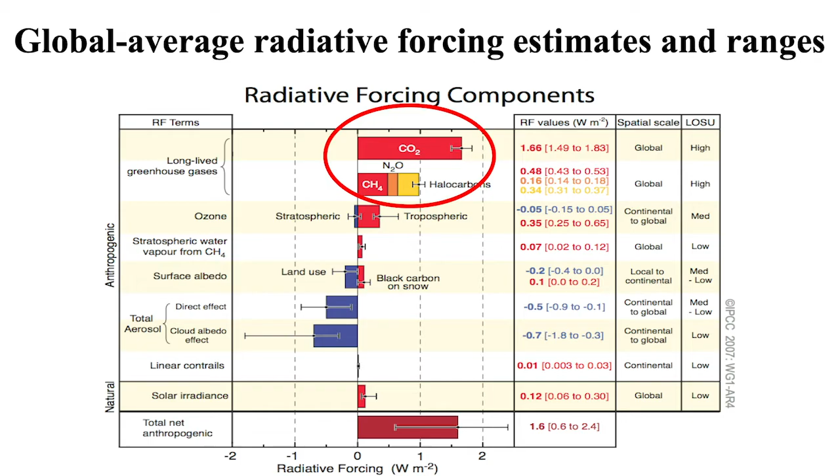The principal reasons are the addition of extra carbon dioxide and methane, CO2 and CH4, into the atmosphere. There are counter effects like clouds, and actually the warming is melting the ice caps, but it leaves the ocean to absorb more heat. The net radiative forcing, as the climate folks call it, is positive and dangerous. And one of the major lessons is we have to reduce the addition of long-lived greenhouse gases to the atmosphere. We're not doing very well at it right now.

So here's how we produce electricity here in the United States. I actually love this diagram. It shows so much once you understand it, and it becomes very clear. I always referred to it as a spaghetti chart until I discovered that it's technically called a Sankey diagram, after a British ship captain who invented it to explain how steam engines worked. Basically, it's a flow diagram, and the thickness of the lines is proportional to the amount of flow in each source.

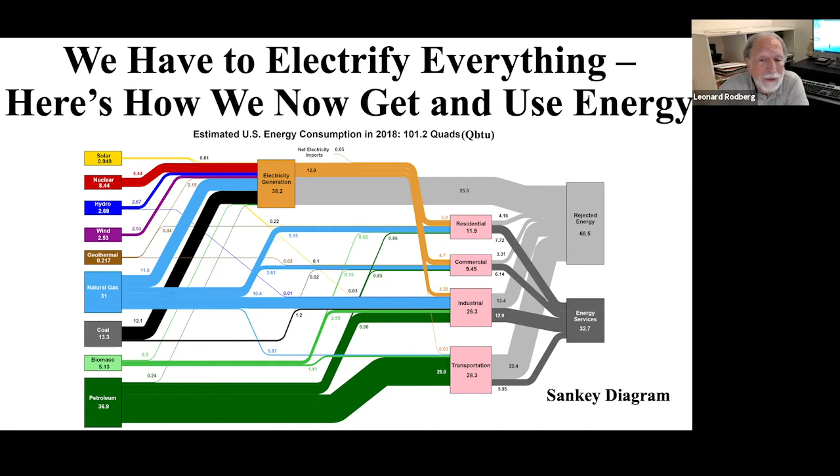This chart is also useful because it's in quads, or quadrillion British thermal units, and it happens that total energy consumption in the US is just about 100 quads. It actually has been that for several decades. Even as our economy grows, we've gotten more efficient at using energy, for a whole variety of reasons. And because it's 101 quads, we can basically treat the number of quads as a percentage of total usage.

And you can see that solar, which is used to generate electricity, is still less than 1% of our total energy use, even though it and wind energy have been the beneficiaries since the 70s of substantial subsidies from the federal government and from state and local governments as well. Wind energy, you can see, is about 2.5% of the total energy use. Nuclear is 8%, and I'm going to, of course, come back and talk about that some more.

The fossil fuels are here: natural gas, coal, and petroleum. You can see that coal is mainly used for electric generation. You can also see the electric generation is about 38% of our total energy use. It's, of course, not final energy. It's then used in one of the four sectors, including here in New York City. A little bit of it drives our subway system.

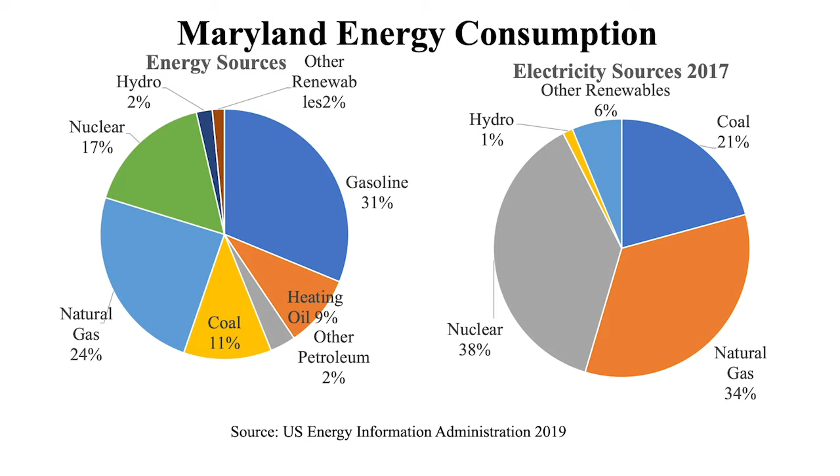Here's Maryland's use of energy. It's somewhat similar. Nuclear energy provides 38% of its electricity. This is the sources of electricity in Maryland. We still burn a lot of coal here. The renewables and hydro are very small. There's the Susquehanna River, the Conowingo Dam up here, but the renewables are still very, very small in total.

And to remind you, here's where the nuclear generated electricity comes from: the Calvert Cliffs plant on the Chesapeake Bay. I call your attention especially to the cost, because I'm going to come back to cost in a little while. It cost $2.2 billion in 2007, basically current dollars, and generates 1,700 megawatts, a little more than $1 billion per gigawatt. A gigawatt's 1,000 megawatts. Today, a nuclear plant built in the U.S. costs somewhere between $8 and $10 billion per gigawatt, rather than one. I'll talk more about that in a little while.

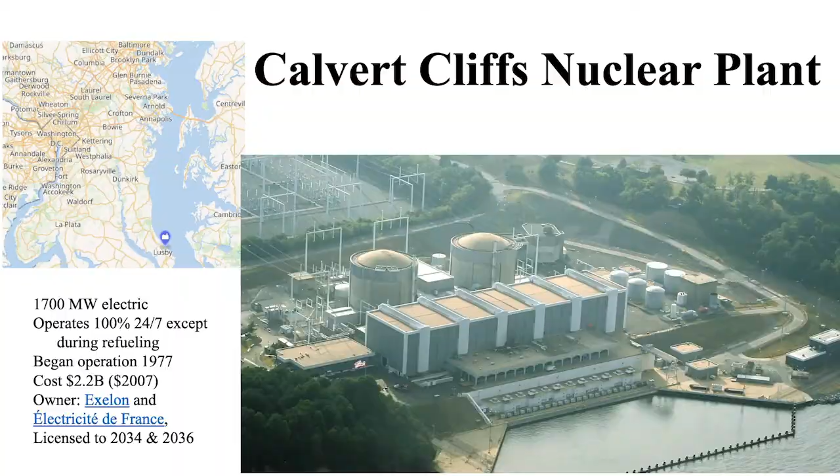Okay, so the major issue we face with the climate is, how do we get rid of fossil fuels? How do we get rid of the burning that generates carbon dioxide and methane? By the way, some of the methane comes from leakage in the pipelines, leakage from the wells from which natural gas is extracted, not from the burning of the methane, but from the leakage of the methane. So, as I said, the most popular belief is that they should be replaced with renewable energy, with wind farms, wind turbines, solar panels, photovoltaic panels, and hydropower.

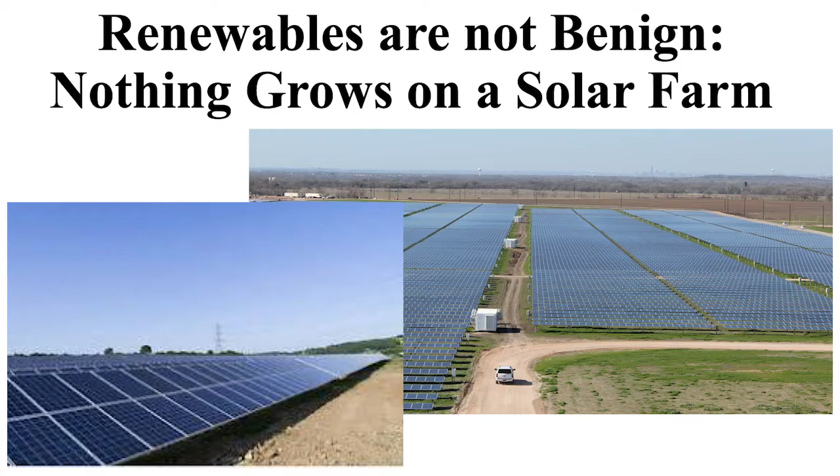So let me look now at the renewables and see what they are and whether they will do the job. First of all, here's a solar farm. It's referred to as a solar farm because it takes up a lot of land. Nothing grows on a solar farm. The sunlight doesn't come through. It's absorbed in order to generate electricity.

When these are built in the desert, and a number of them have been set up in Arizona, they have to move out the animals, the turtles and other creatures that are living in the desert, because they're in the way of the construction, but also they can't live under this. So this would convert a lot of green pastures and green prairies into, well, wasteland, just brown.

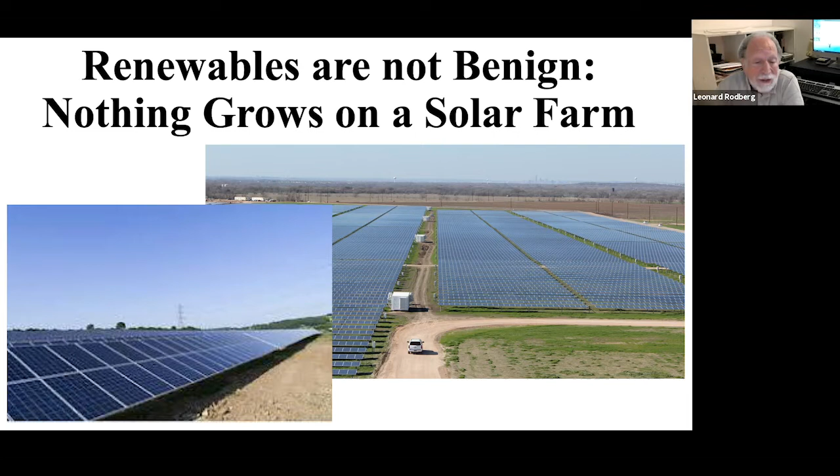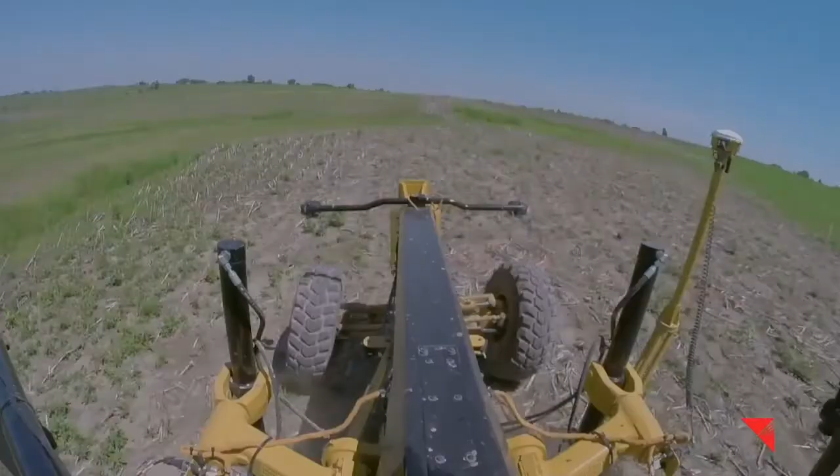And I want to show you how a wind turbine gets built. This is MidAmerican Energy, which is one of the installers of wind energy. Take a look. You'll see it's a major construction project with significant environmental impact. It is not some small do-it-yourself project.

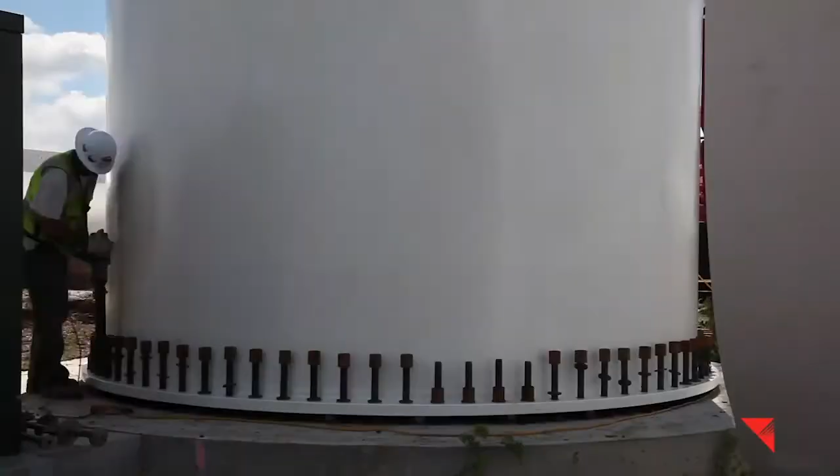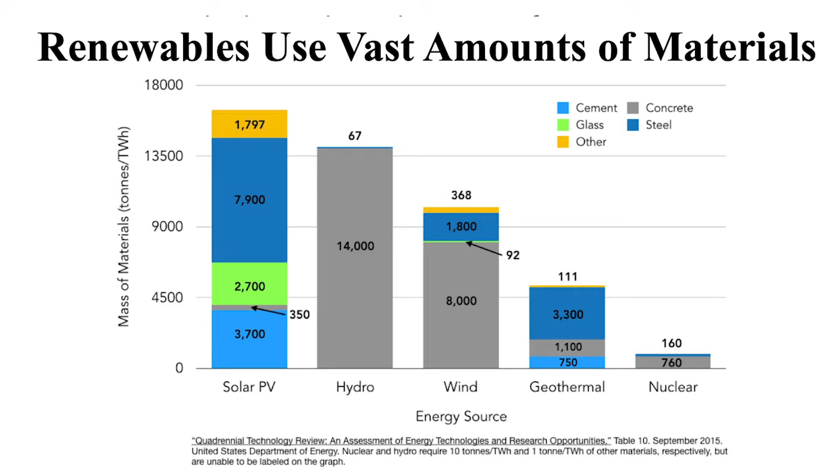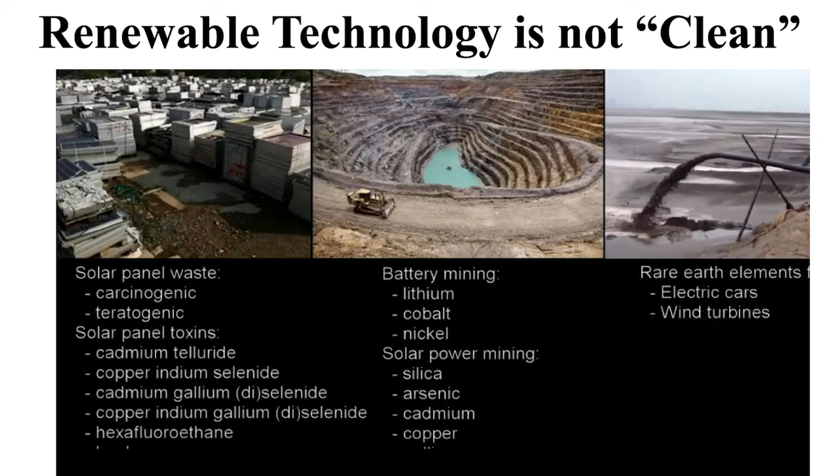They're not, again, easy to use materials. They come from mining, extensive mining, particularly in China, Africa, other places. Doing this on a much larger scale than we're now doing will have even greater environmental impact than it has now. And they generate a huge amount of waste.

And this is all toxic waste, because a lot of these materials, if you try to recycle them, involve rare earth metals and various things that we tend to ship out to China and other places and let other people deal with the residue from our waste stream. And this is a huge waste stream, especially if you think about trying to run the country on it.

So there are practical problems that I think explain why solar and wind, in spite of the support they've had, both financial and political, over the last 50 years, still are a very small part of our energy mix.

It's hard to quantify, but the decision to install any of these, any place in the country, is broad, diffuse, involves many individual decision-makers in thousands of communities and millions of homeowners if we intend to go all the way to trying to basically power our country, our society here and globally with these sources. They have to agree that they want these facilities installed in their neighborhoods. You've probably read or heard about people who don't want to see the windmills offshore from their summer retreats on Cape Cod and other places.

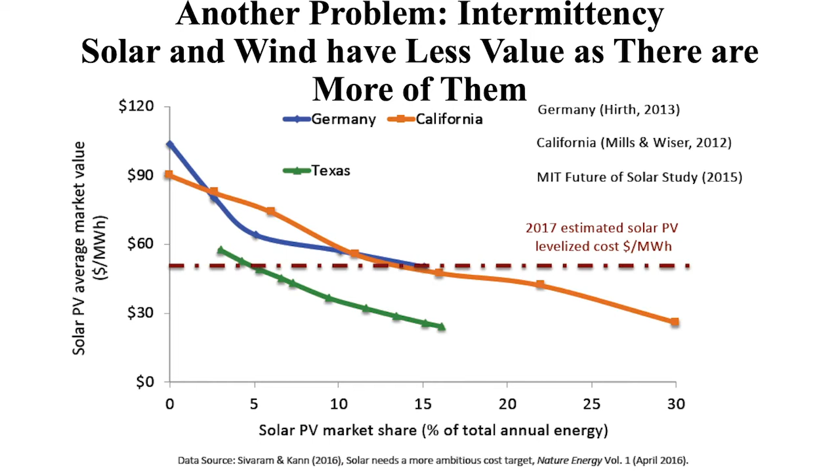In fact, the German program has stalled because it doesn't pay to add more, and they start to run into opposition from people who don't want more windmills in their backyards. The best studies of this that I've found are done by a team at MIT. Jesse Jenkins was one of the leaders and has been giving a series of very interesting talks. I have a few slides here from him. He's now an assistant professor at Princeton, but worth following.

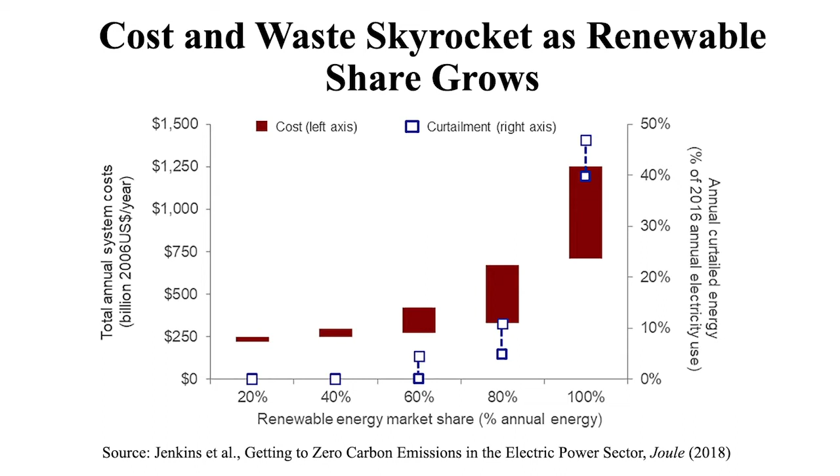So overall, my conclusion is solar and wind are first too weak individually, so you need massive amounts of them. They have to be too widespread, so there's thousands or millions of local decisions, and they're too unpredictable. So you need both to build excess amounts of them, and then you have to have backup for when they're not shining. You either need long-term storage, even from summer to winter, because there's much less sunlight in the winter than in the summer, but we don't have anything close to that, even conceptually, or backing up with natural gas, but then you're creating carbon dioxide. So they're just not suitable for running the society.

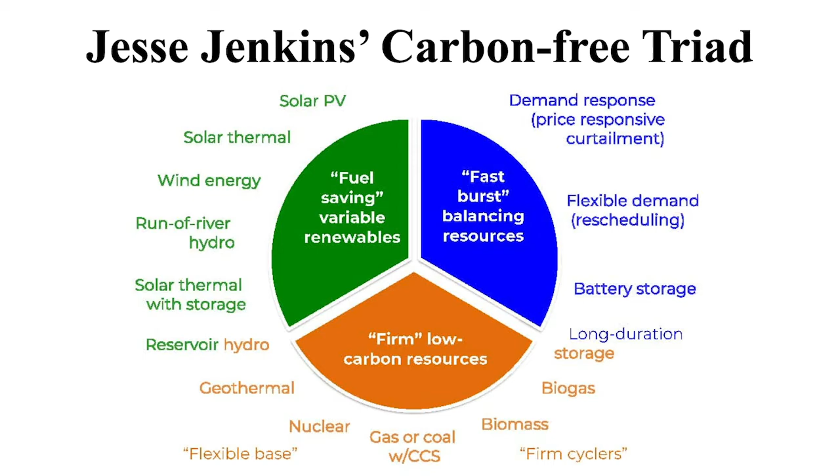And long duration storage doesn't exist. So nuclear is the one thing down there that's real. He's avoiding getting into the renewable versus nuclear controversy by using this framework, and it serves him well.

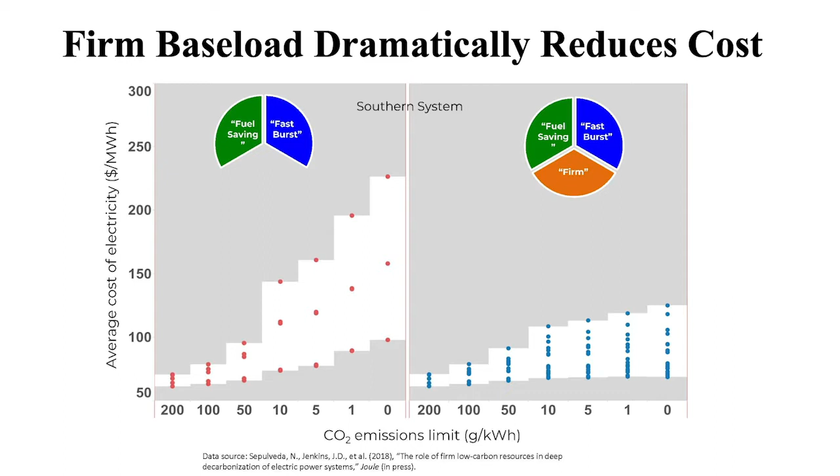If you build in some firm sources like nuclear, the costs are very, very much lower because you have a steady, reliable base load. And you don't have to overbuild the renewables so much. So let's talk about nuclear power.

It has a long history in the United States going back to 1950. The first reactors built, well, there was a prototype in Shippingport, Pennsylvania, and there were Hyman Rickover and the submarine-based reactors that he built, and that had a great influence on the design of power-producing reactors like the Shippingport one. We then had commercial reactors built in the 60s and 70s. Remember, Calvert Cliffs went online in 77.

There's now underway what's called Generation 3 reactors. There's several being constructed in South Carolina in the United States, but a lot using the same Westinghouse designs in China, South Korea, Taiwan, other places around the world. And then people are developing a Generation 4, which I'll talk about in a few minutes.

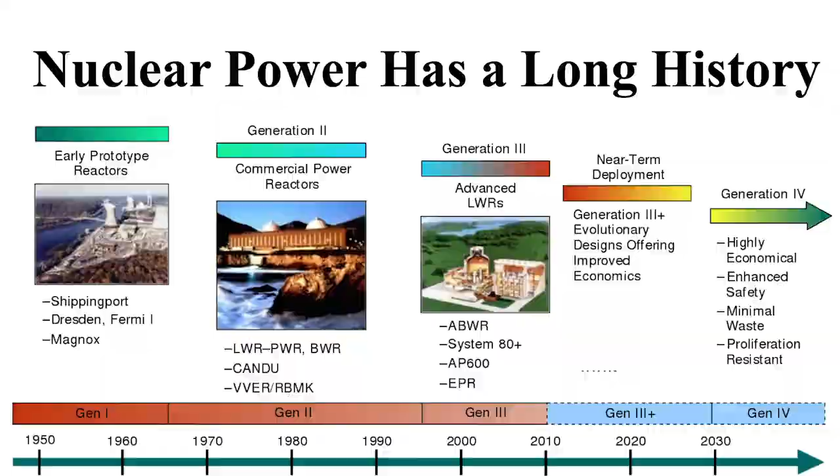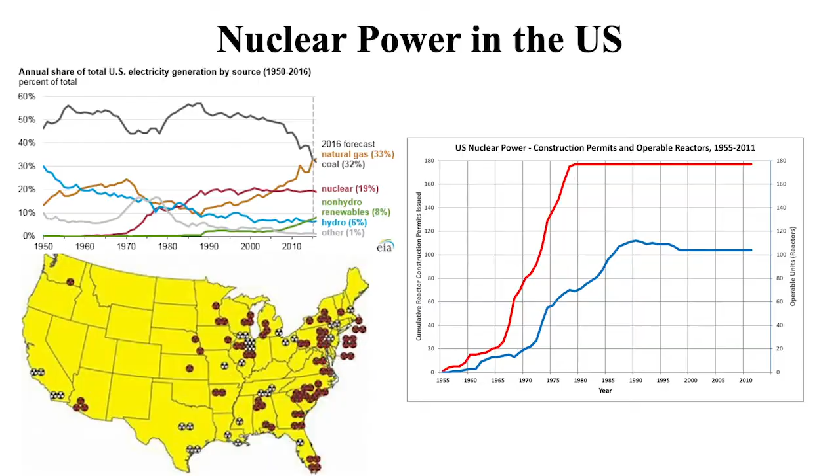The key problem with nuclear power is that people are afraid of it. This is a typical survey. People love solar and wind, and they are not so favorable, or they're very unfavorable towards nuclear power. Well, this has a lot to do with the history of nuclear energy in the world and in this country.

I put up this chart. I've been involved, as I said, in the 60s. I was involved in the U.S. Arms Control and Disarmament Agency in getting the test ban and getting the limits on missiles. I think when I spoke here in 65, I was talking about limitations on nuclear missile deployments.

But people who organized in the 60s against nuclear fallout and in favor of banning atmospheric nuclear tests, when the treaty was signed in 63 and the Non-Proliferation Treaty in 68, they shifted their attention to nuclear power. They'd already become agitated about the radioactive fallout from nuclear testing, and they translated that into opposition to commercial nuclear power.

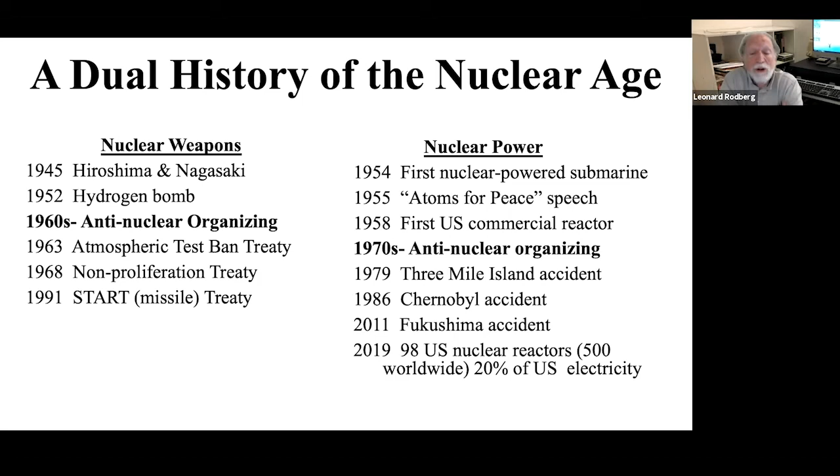And then there were the three, I'll say, notorious accidents. Three Mile Island in 79, which was just a couple of years after Calvert Cliffs went online. And then there was the Chernobyl accident and the one in Fukushima. I'll have more to say about them in a few minutes. So there were really two nuclear myths.

When I was in the government 60 years ago, we were told there was a missile gap, that the Russians were way ahead of us. It turned out when we actually sent the first photographic satellites over Russia, we discovered, in fact, they had 4 ICBMs, and we already had dozens and dozens, and soon the missile gap was in our favor. It was one of the myths.

And the second myth today is that nuclear energy is too dangerous to use. The result at the moment is we have no good answer to climate change, and we continue to burn more and more fossil fuels. And I think we have to get smart and understand that there are huge misunderstandings about nuclear energy.

Here's the results of 3 serious scientific studies of those 3 accidents. At Three Mile Island, there were no deaths. No one died as a result of the meltdown. One of the reactors melted down. And the President's Commission, it was run by Dr. Kemeny, who was the president of Dartmouth at the time. It said, in spite of serious damage to the plant, most of the radiation was contained. The actual release will have a negligible effect on the physical health of individuals.

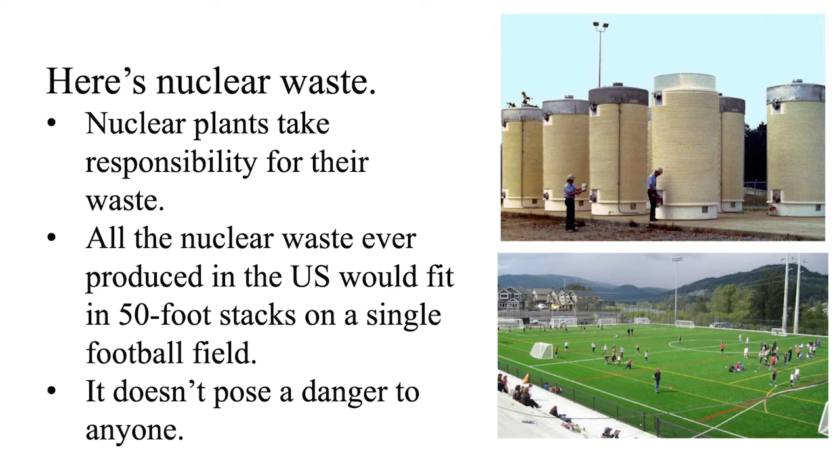All the waste ever produced in the United States from nuclear reactors in the last 50 or 60 years would fit in that football field, if you stack it about 40 to 50 feet high. And it doesn't pose a danger to anybody. It just sits there. In fact, there's a way to actually use it up that I'll come to in a few minutes.

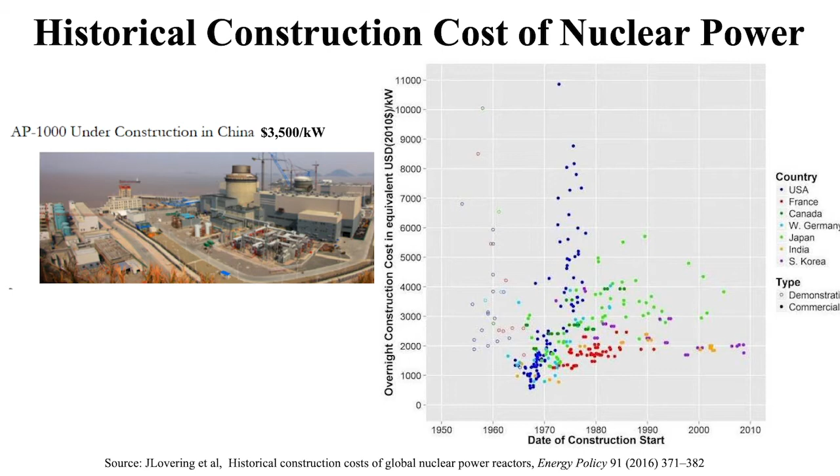Other countries haven't gone quite in that direction, and this is sad today. Here's China. This is an AP1000. It's a Westinghouse design, and it's being built at $3,500 per kilowatt. You can see the scale here. The reactors started, like Calvert Cliffs, at about $1,000 per kilowatt, but then it skyrocketed as we started to have to add additional shielding and very heavy containment vessels and so on.

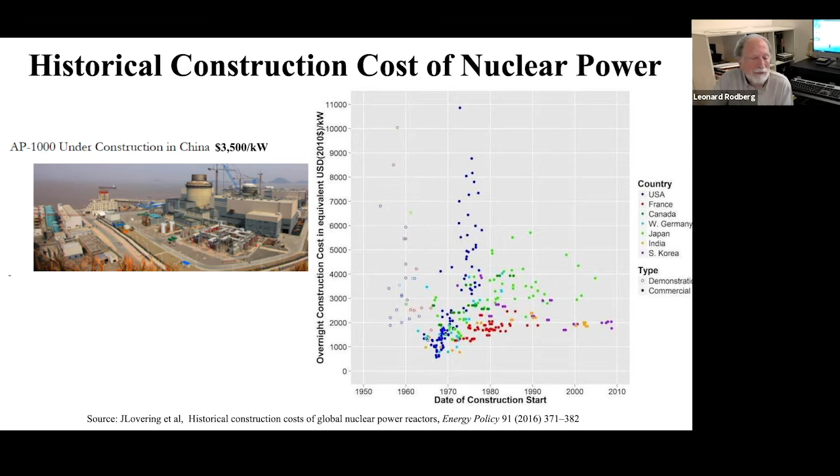Other countries are moving ahead. In the United States, there's one nuclear power plant being constructed in South Carolina, and so far it's costing, I don't know, somewhere between $6,000 and $10,000 per kilowatt. Got a false start. They built it without having any blueprints, and they had to tear down a huge... Anyway, we haven't built enough to have any experience in how to do it anymore.

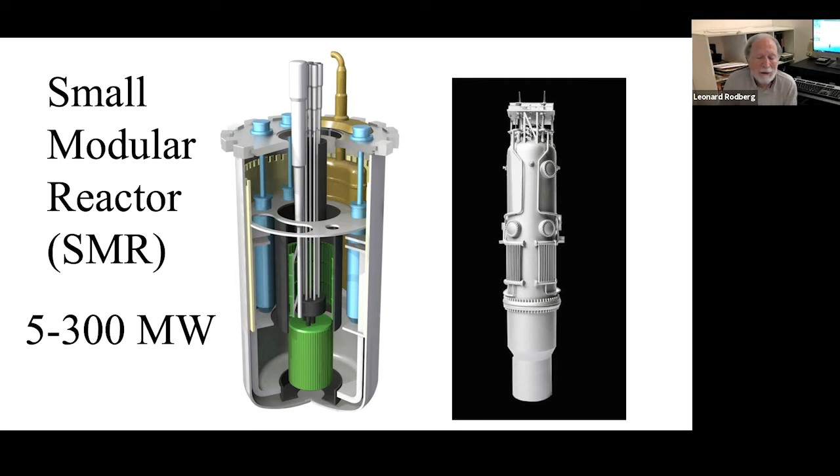Well, here's the model. This is a generation 4 reactor. The newest models are small, self-contained, and self-protecting. That is, they're what's called passively safe. If they overheat, basically they expand. There are 2 models. Either they expand and the chain reaction stops automatically, or if they get overheated, a seal opens and they get flooded with water or with liquid sodium in some cases, and they turn themselves off. That is, there's no operator intervention needed.

This is a model of what it would look like to transport a nuclear reactor, take it out to its site and install it. The costs are estimated between $1,000 and $2,000 per kilowatt. What you need is either a market where you expect electricity demand to grow, or you need government policy which will require that existing fossil fuel plants be replaced by nuclear power plants.

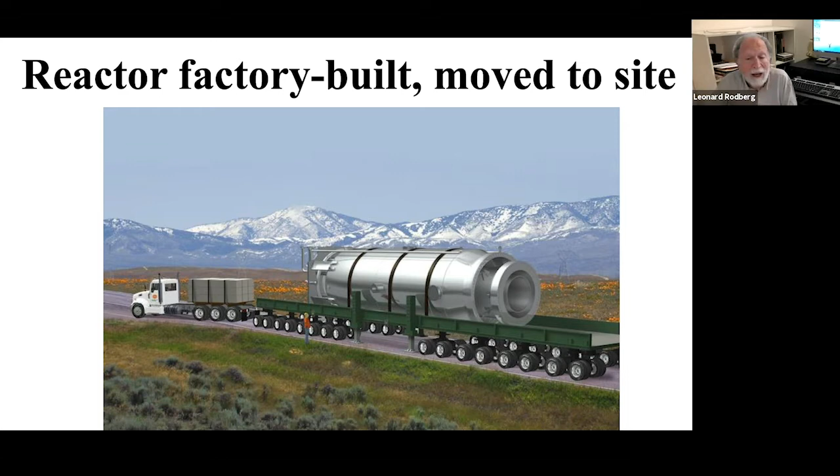These generation 4 reactors, they can't melt down. Some of them are breeder reactors. That means you can take the existing waste, which is mostly just uranium-238, and consume it as fuel. Basically, you put it in the reactor, it gets converted to plutonium. The plutonium breaks apart in fission, produces energy. You end up consuming most of the waste. The radioactive waste that results is much smaller, and it'll last perhaps a couple of hundred years of radioactivity, not the thousands that we have now.

The fuel would be reprocessed internally, so you wouldn't have the worry that, again, is expressed that people will use reactors to generate bombs. These can be built in factories rather than on site, so you just build it at the factory like you build an airplane in a factory, and you carry it to the site and put it in a hole in the ground. And dozens of these models are being developed around the world.

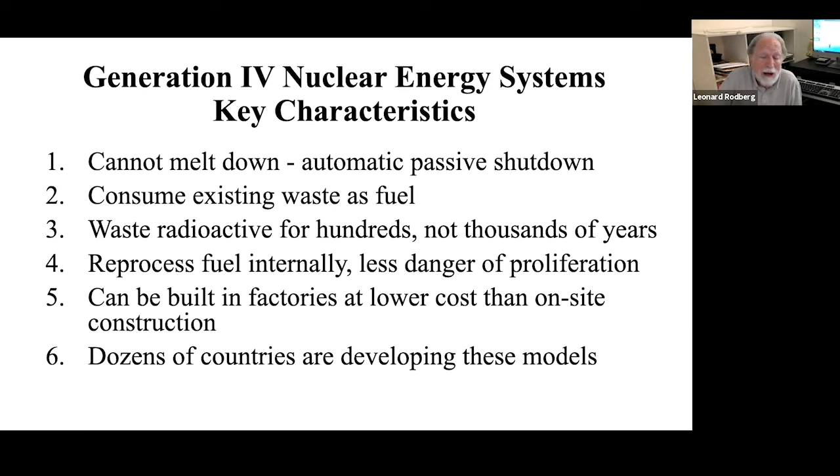So my conclusion, in short, is that solar and wind are simply too weak, too widely dispersed, too variable to power a modern society. Nuclear power is the only energy source that can expand enough and is reliable enough. The new types of reactors will be safe. They'll leave minor amounts of waste, and they'll cost about 1/3 of what renewables will cost.

And finally, but very importantly, the public's unwarranted fear of nuclear energy has to be overcome because of this history of concern about it. I think younger people may not have as much concern, but it's still a serious political issue. I offer you a quote that somebody sent me from John Adams: facts are stubborn things, and whatever may be our wishes, our inclinations, or the dictates of our passions, they cannot alter the state of facts and evidence.